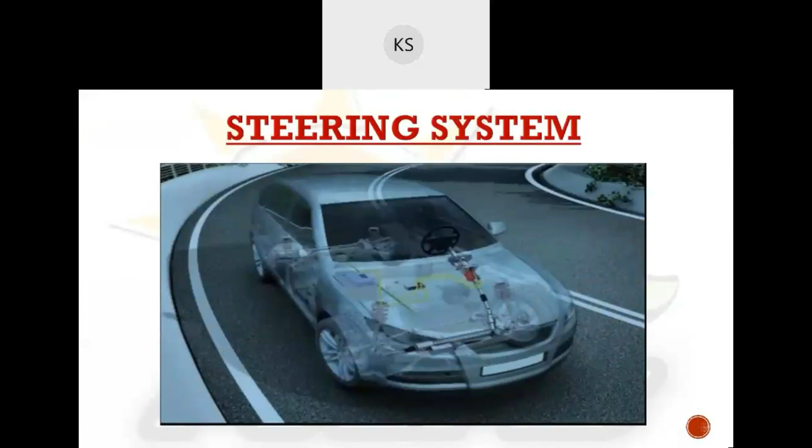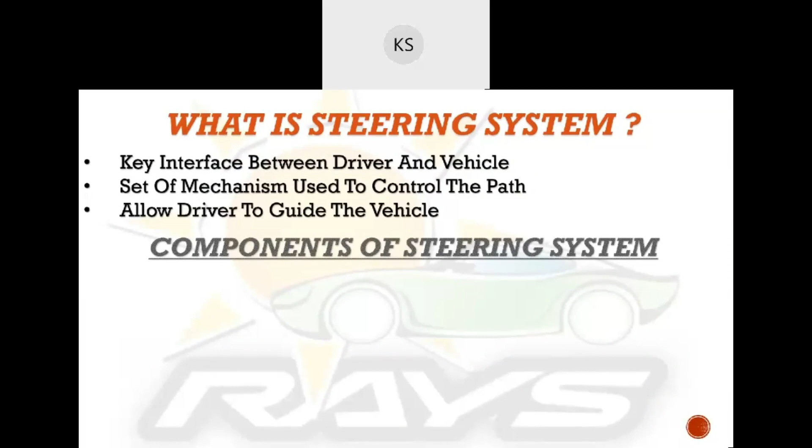So now we will see the steering system. So what is a steering system? Basically, it is a key interface between a driver and vehicle. It converts the rotation of the steering wheel into a swiveling movement of the road wheels in such a way that the steering wheel rim turns a long way to move the road wheels a short way, which allows the driver to guide the vehicle.

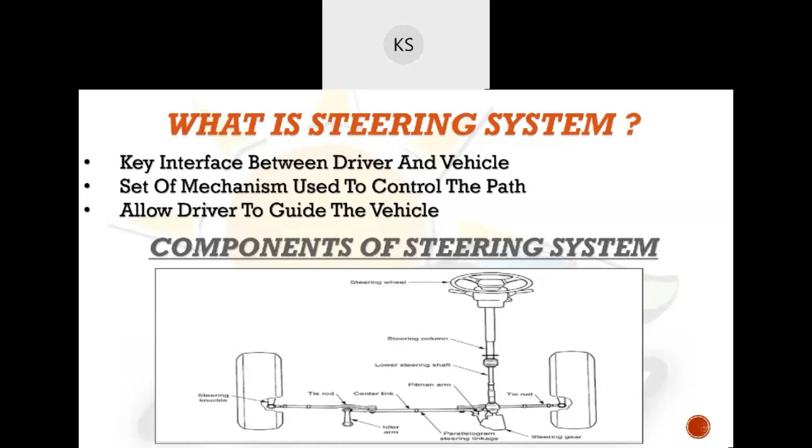So now we will see the various components of the steering system. It includes steering wheel, steering column, lower steering shaft, pitman arm, tie rod, steering gear, parallelogram steering linkage, center link, idler arm, tie rod, and steering knuckle.

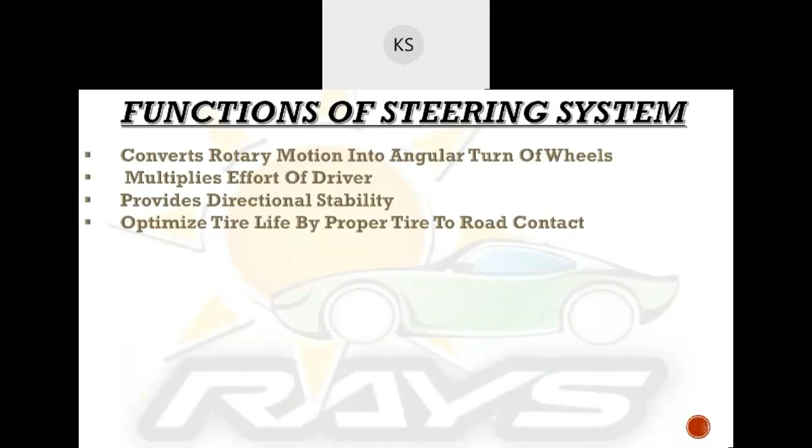Now let's have a look at the functions of a steering system. It converts rotary motion into angular turns of wheels. The system allows a driver to use only light forces to steer a heavy car, so it multiplies the efforts of the driver.

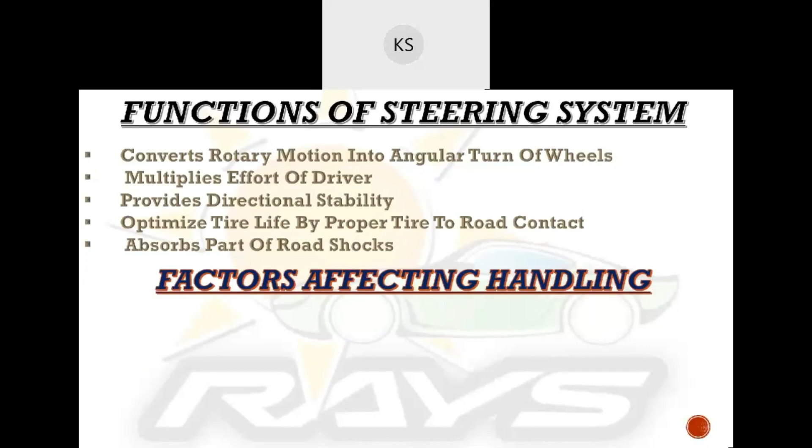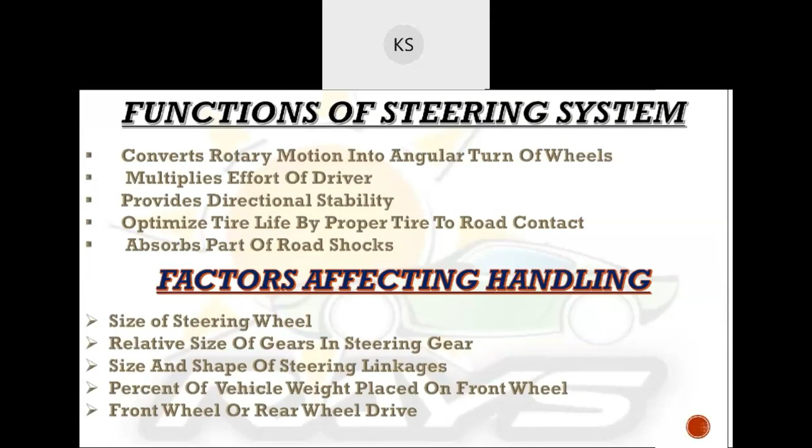It provides directional stability. It absorbs part of road shocks and optimizes the tire life by proper tire to road contact. So these were some of the functions of the steering system. Now the factors which will affect the handling are size of steering wheel, relative size of gears in steering gear, size and shape of steering linkages, percent of vehicle's weight placed on the front wheel, and the front wheel or rear wheel drive. So that was the brief introduction of a steering system.

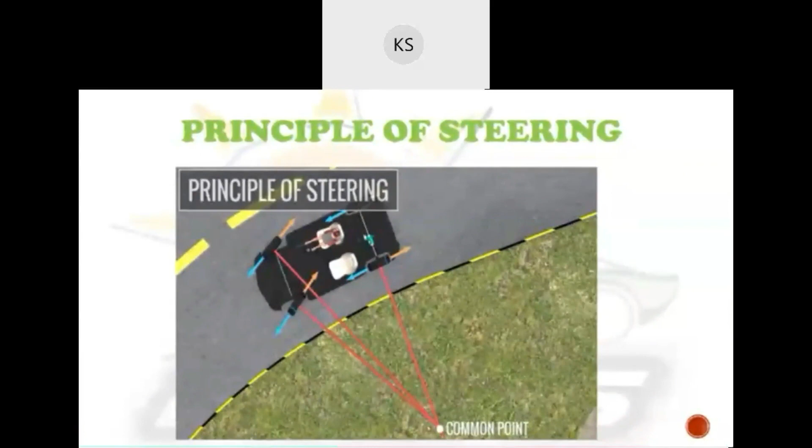Now, as Kusagra explained to you about the functions and factors of steering system, let us know about the working of steering systems and different types of steering systems. Before that, we have to understand the principle of steering system. While we take a turn, there are some amazing physics and mechanics beneath the steering wheel, which keeps the vehicle without any skidding of wheels. Now, let us consider a rolling wheel. The rolling wheel must have zero velocity at the contact of the road. This will make sure that there would be no chance of slippage.

Now, what about when the car takes a turn? When a wheel takes a turn, both will not get cancelled. In order to get cancelled, the vehicle should take a turn with respect to the center point or common point. Now, how do we get this common point? See, we draw a line from the back of the wheels, and two lines from the front wheels. As these three lines combine at a point, that point is called common point. With this common point, the whole vehicle takes a turn so that we can get zero velocity at the contact. So this is called principle of steering.

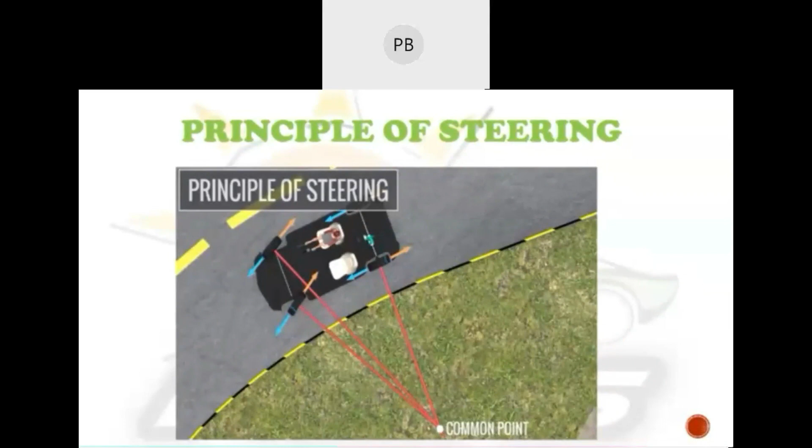Now let us see about manual steering. In the manual steering, the components are: the green color we call as rack, and upon the rack we have pinion, the blue color we have arms, and the white color we have tie rods. See here, the teeth present in the rack are used to make it move sideways. So the pinion makes this rack move sideways. The rack only moves sideways and the pinion helps it move sideways, so the wheel can take turns. Now there is a short video so you can understand easily.

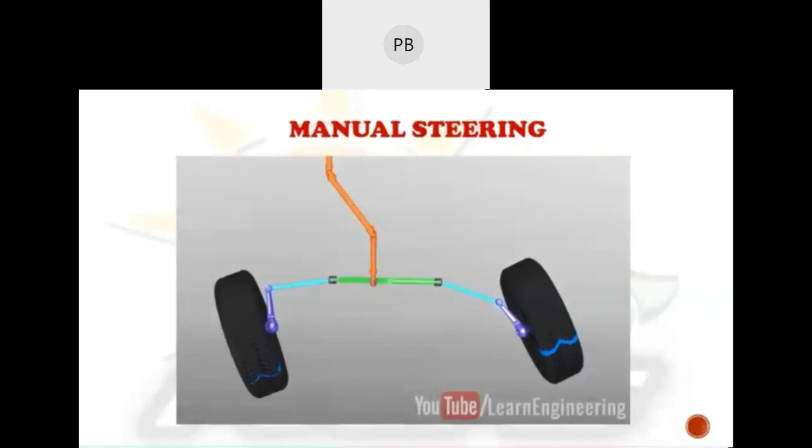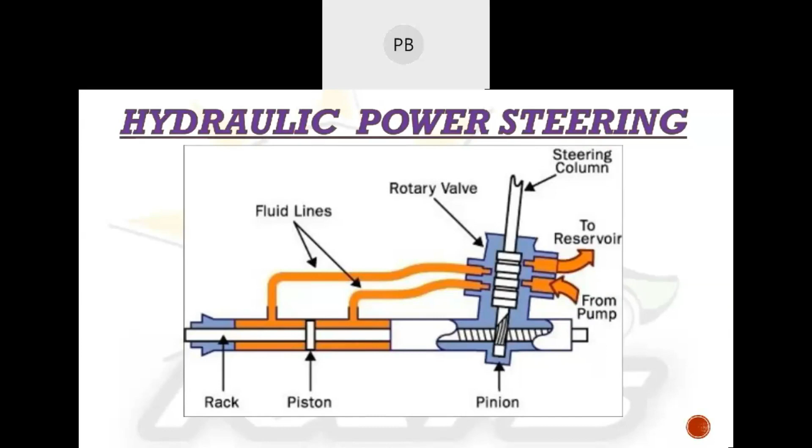Now hydraulic power steering. These are the components. We have steering column upwards. Before the steering column, we have rotary valve and the liquid, with the help of highly pressured liquid. Now let us see the working of the hydraulic power steering. Next slide. See here, you can easily observe. Here we have a reservoir in which the highly pressured oil is present. The liquid in the reservoir is sent to the oil pump and it goes through the directional control valve. As per the direction the driver wants, the liquid is then supplied to the piston. As the liquid is very highly pressured, the piston will get pushed.

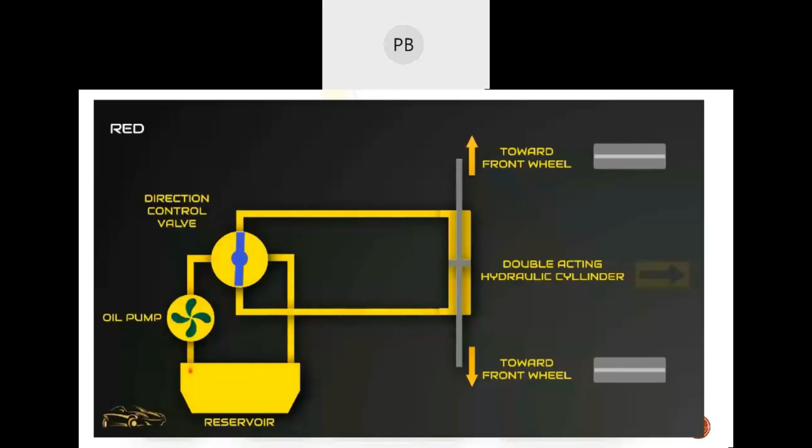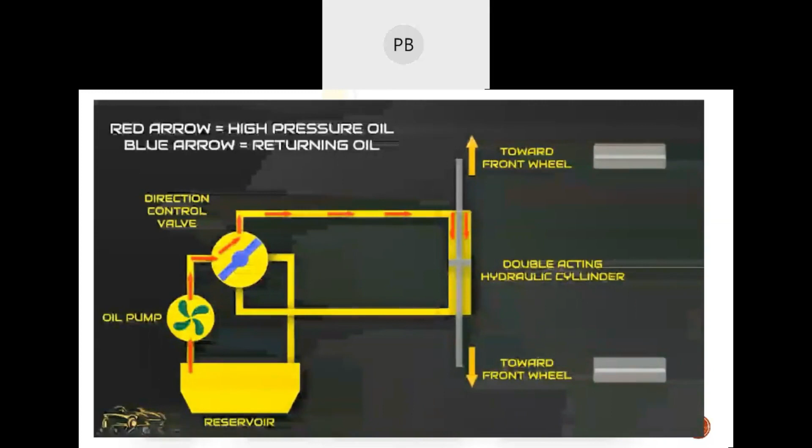So if the driver wants a right turn, then the piston will get pushed towards the left, so the driver can get the right turn. Here is a short video so you can easily observe. The liquid is passed through the oil pump and then the directional control valve, and the liquid passes near to the piston. As the liquid is very highly pressured, the piston gets pushed. As the piston gets pushed, automatically the rack gets pushed. As the rack gets pushed, the wheels take the turns, and some of the hydraulic fluid comes back to the reservoir.

And now electric power steering. Nowadays most cars are using power steering. The main reason to use power steering is it makes steering effortless and more accurate. Near the rack we have a cylindrical shape, in which we have a brushless DC motor. It is the main key to take the turn. This brushless DC motor rotates both in clockwise and anti-clockwise direction. When the driver wants a right turn, it takes the clockwise direction. When the driver wants a left turn, it takes the anti-clockwise direction.

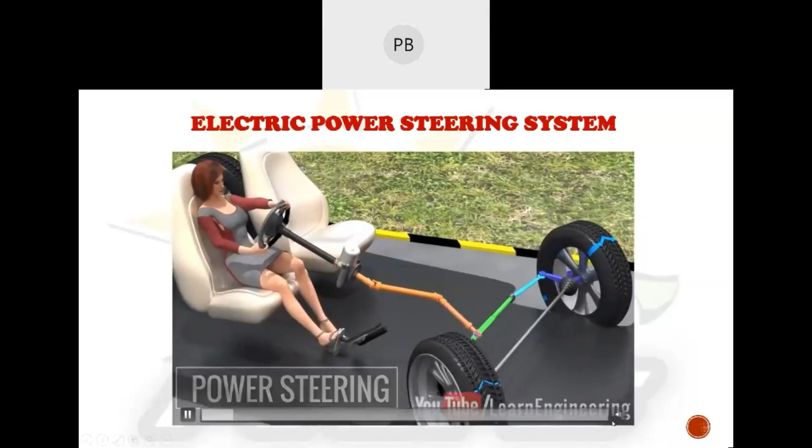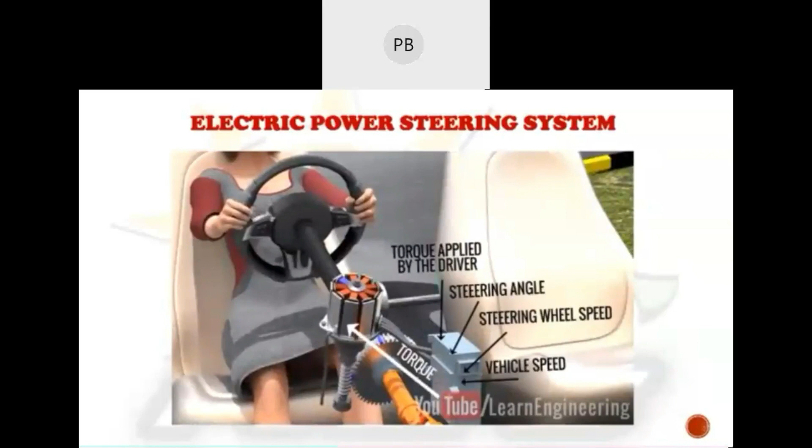Main part. So this ECU takes the torque from the driver as the input and then decides the amount of torque to be applied on the rack. So in this way, the wheels get the turns.

Next, we see the difference between the manual and power steering. So manual steering is we have only rack and pinion, so drivers should apply more torque. But in the case of power steering or hydraulic steering, there are some external forces by using oil or electric, so the driver can apply a small amount of force.

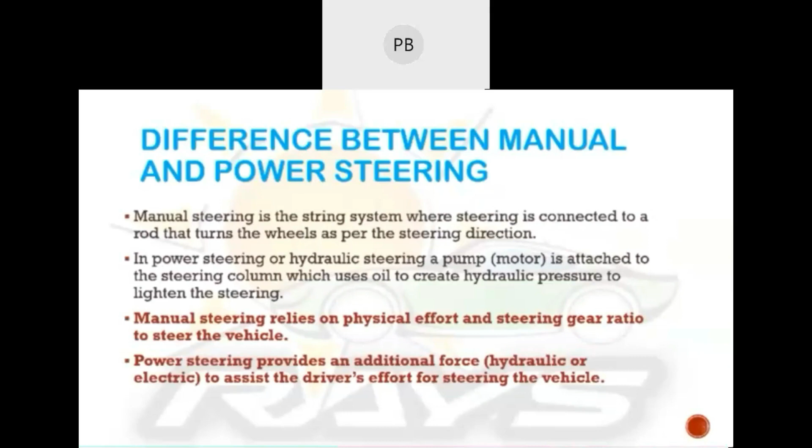Now, manual steering relies on physical effort and steering gear ratio to steer the vehicle. But in the case of power steering, it provides an additional force, whether it is from hydraulic or electric, to assist the driver effort for steering the vehicle. And now I introduce Komal Rani to explain you about the suspension system.

So now, starting with what is suspension system? It is a term given to the system of springs, shock absorbers, and linkages. It serves a dual purpose, like it contributes to the car's handling as well as braking. It protects the vehicle from any kind of wear and tear.

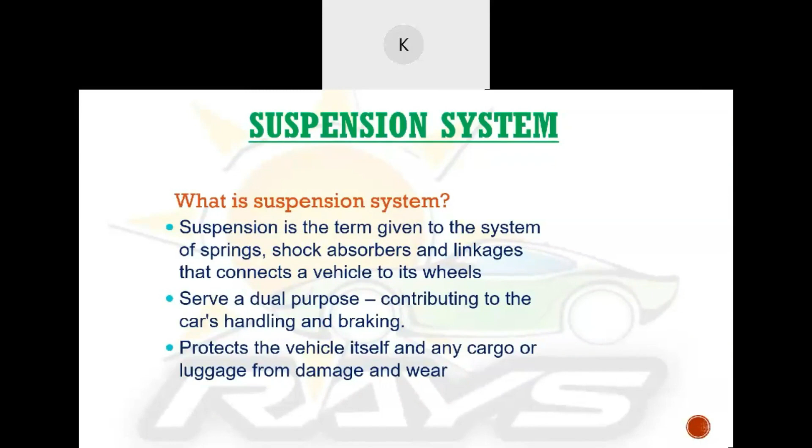Next slide. Now coming to what is the purpose of suspension system? Suspension system provides stability to the vehicle in dynamic conditions like high speed, sharp turns, and braking. It keeps tires in firm contact with the road. It works with the steering system to keep the wheel in correct alignment.

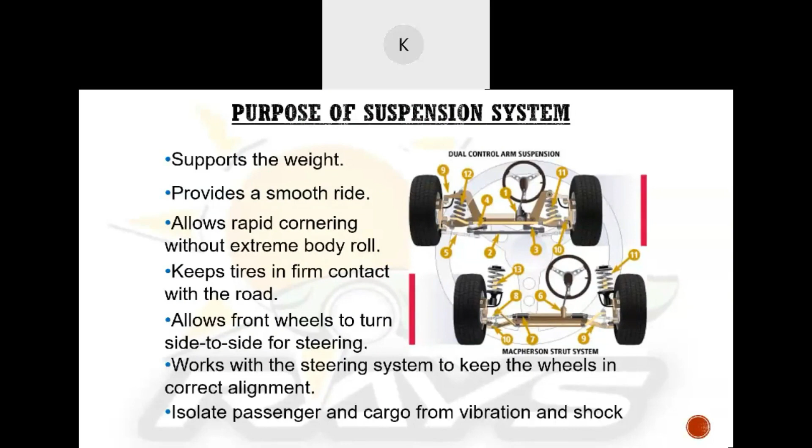Now coming to the types of suspension system. There are two types of suspension system. First one is non-independent suspension system. Before starting the types, you must be familiar with the fact that the front left and the right wheel are connected through the solid axle and the front wheel and the rear wheel are connected to the solid live axle.

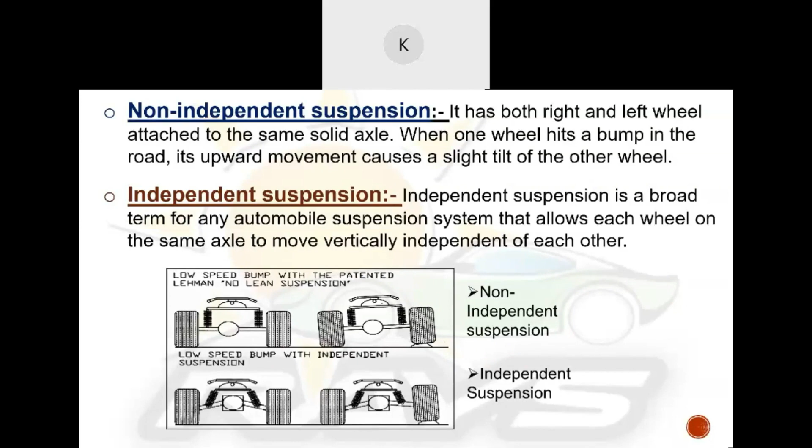When the front wheel comes across any bump, it leads to the upliftment of the opposite wheel connected to the solid axle or the rear wheel connected to the solid live axle, and it is used in case of trucks. The second one is independent suspension system. In this, each wheel on the same axle is allowed to move vertically independent of each other. Now, Mosam will continue further with the parts of suspension system.

Thank you, Komal. Now coming to the basic parts of the suspension system. So the very first part is spring. A spring provides support to the weight of the vehicle. It also permits the control arm and the wheel to move up and down. Now the next part of the suspension system is shock absorbers. These are also called dampeners, which keep the suspension from bouncing back after compression and extension of the spring.

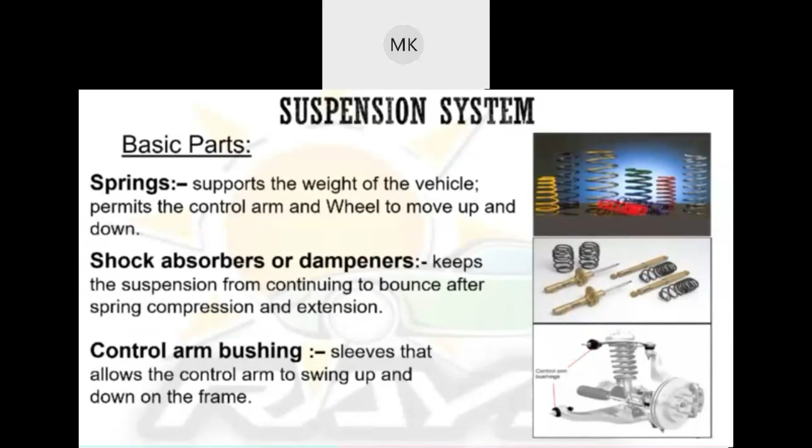The third part is control arm bushing. These are the metal sleeves that allow the control arm to swing up and down on the frame. A bushing is used to provide stability to the vehicle.

Now talking about the basic tire terminology, the very first term which we should know is camber angle. So what is camber angle? This is the angle which is subtended by the wheel plane with the vertical. There are two types of camber angle: positive camber angle and negative camber angle. A positive camber angle forms when the wheel tilts outwards from the vehicle, and the negative camber angle forms when the wheel tilts toward the inward side of the vehicle.

The next term is caster angle. It is the angle subtended by the steering axis with the true vertical. If the steering axis tilts to the rear side of the vehicle, then it is said positive caster angle. If the axis is straight, then it will be called zero caster angle. And if the axis tilts to the front side of the vehicle, then it is called negative caster angle. In general, positive caster angle is provided to most vehicles because it provides stability to the vehicle.

Now, what is toe in, toe out? If we look at the wheels from the upper side of the vehicle, we would observe that both of the wheels are not parallel. If the front of the wheels are going apart from the rear side of the wheel, then it is called toe out. And if the front of the wheels are going closer than the rear part of the wheel, then it will be called toe in. So that's all from me.

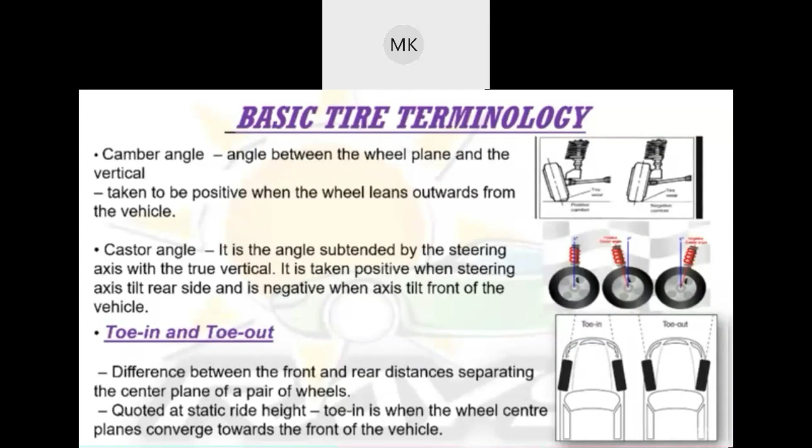Now I would like Sonu to come and continue the further part.

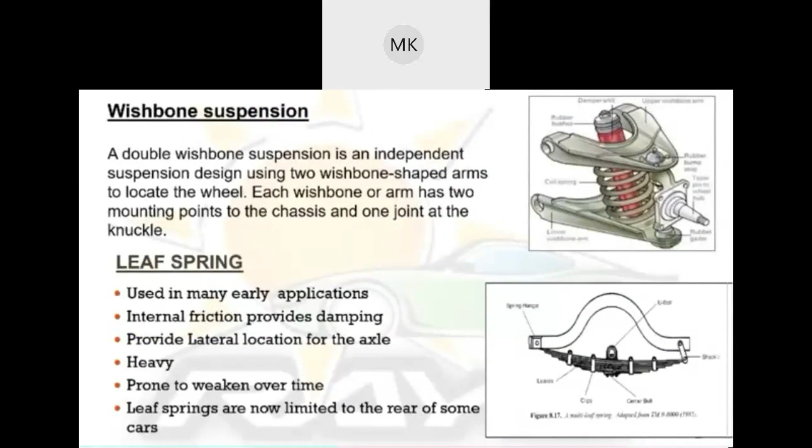As you have gone through what is suspension, its purpose, its basic parts, now you are going to see the types of suspension. There are various types of suspension, but we are interested in three of them. So first one is wishbone suspension. What is wishbone suspension? A double wishbone suspension is an independent suspension designed using two wishbone shaped arms to locate the wheel. Each wishbone or arm has two mounting points to the chassis and one joint at the knuckle.

Here, as you can observe in the figure at right side, there is a spring attached between two wishbones. This spring plays an important role in absorbing shock. Most importantly, in our solar car.

This type of suspension can be seen in large vehicles such as trucks. You can see on the right side in the figure, leaf spring is a set of blades, and in between blades, friction occurs, which provides damping. Also, it provides lateral location for the axle. It is heavier. With passage of time, due to internal friction, wear and tear of leaf spring happens, and it weakens them, and after some time, it breaks.

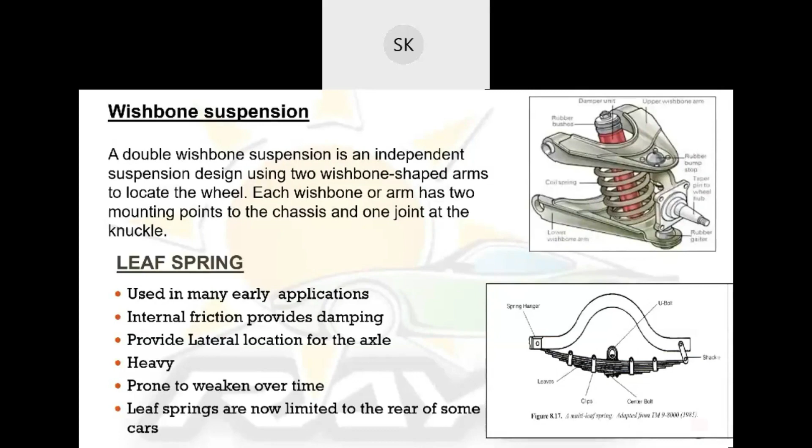Now, next one is coil spring. Slides. Change. In this, internal damping does not occur. Also, cost is low. Size is small, compact size, used in many suspension types. It is commonly used in modern vehicles.

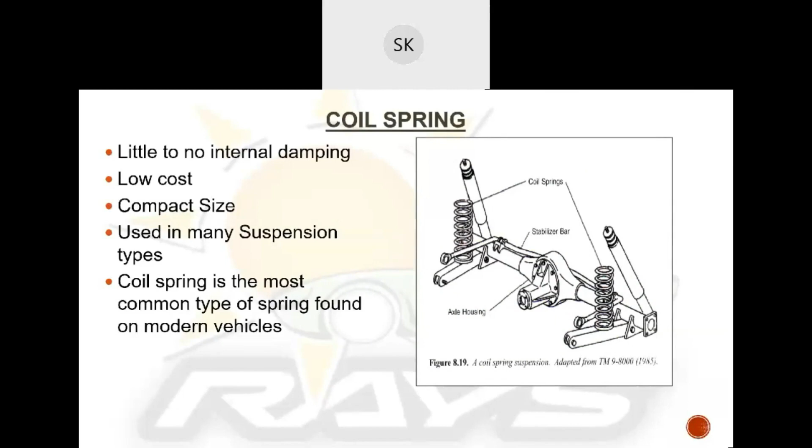Next. Now let's look at a new device, that is differential. Now, what is differential? The differential is a device that splits the engine torque two ways, allowing each output to spin at different speed. It means two wheels with common shaft can rotate with different angular speed. In the below picture, you can see there is an arrangement of gears in between shaft, and that is the main component of differential. It can be found in all modern cars and trucks.

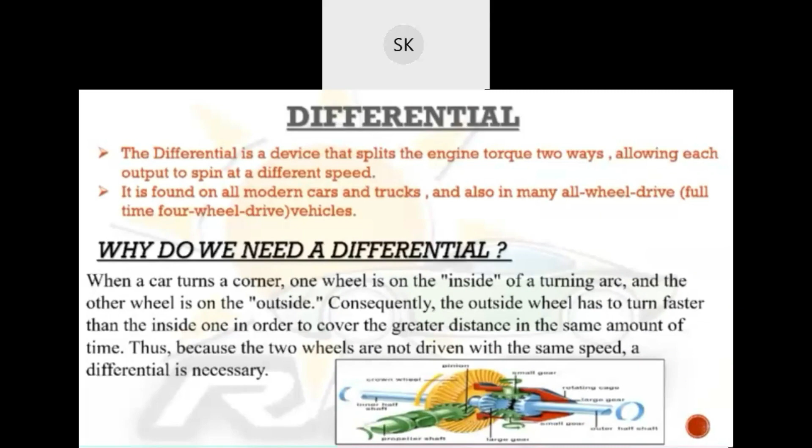Now let's understand why do we need a differential. When a car turns a corner, one wheel is on the inside of a turning arc and the other wheel is on the outside. Consequently, the outside wheel has to turn faster than the inside one in order to cover the greater distance in the same amount of time. Thus, because the two wheels are not driven with the same speed, a differential is necessary.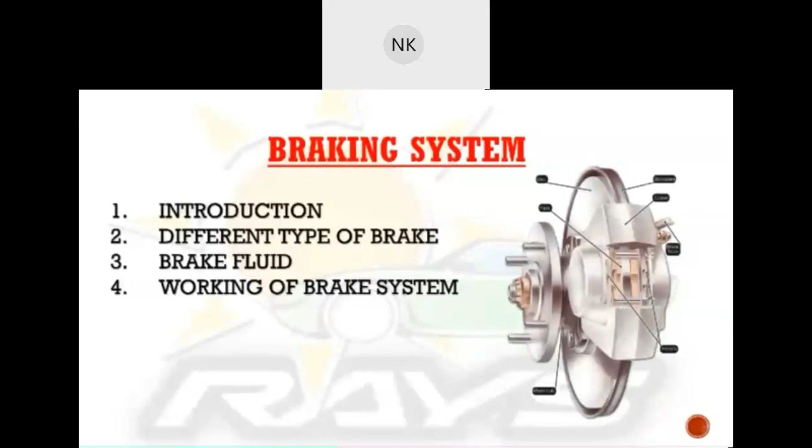Now, after seeing the suspension system and steering system, now I will be explaining braking system. So, when it's driving safety, nothing is more critical than your brakes. Purpose of brake in our vehicle is for either stopping the vehicle or reducing the speed. In this section of braking system, about the different types of brakes, braking fluid, because most used brakes are based on a hydraulic pressure system, and at last we will see about the working of braking system.

Now, starting from the introduction part, as I mentioned, braking is the mechanism used for slowing down and stopping the vehicle. And here we will also see how a small force on a brake pedal leads to stopping such a large vehicle. This we will see in the working of braking system. And moving on to main function of braking, it's to stop the vehicle safely in shortest possible distance in case of emergency, and to control the vehicle when it is descending along the hill, to keep the vehicle in the right position after braking, bringing it at rest.

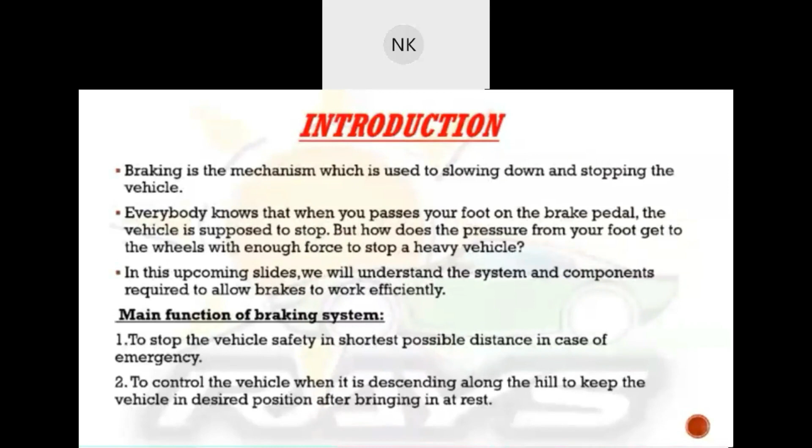Now we will see about different types of brakes. Mainly there are two types of brakes, disc and drum brakes. Disc brakes and drum brakes are both based on a hydraulic pressure system, and braking starts with a mechanical force, your foot pressing the brake pedal. Now starting with a disc brake. Disc brakes are found on most vehicles today. They are mounted on the front axle and often the rear as well.

Now a question might come in your mind, which brake is better? Although both brakes operate with same basic hydraulics, they perform differently. Disc brakes are more efficient and they are the most common types of brakes used nowadays, because they provide better stopping power. They dissipate the heat very easily, and they work better in wet conditions.

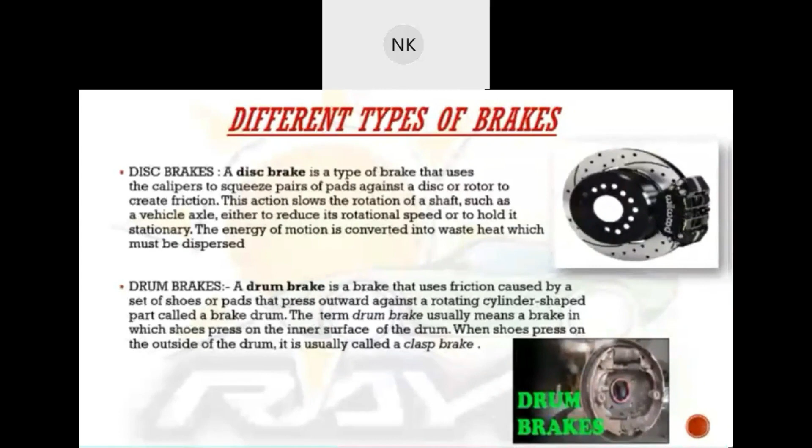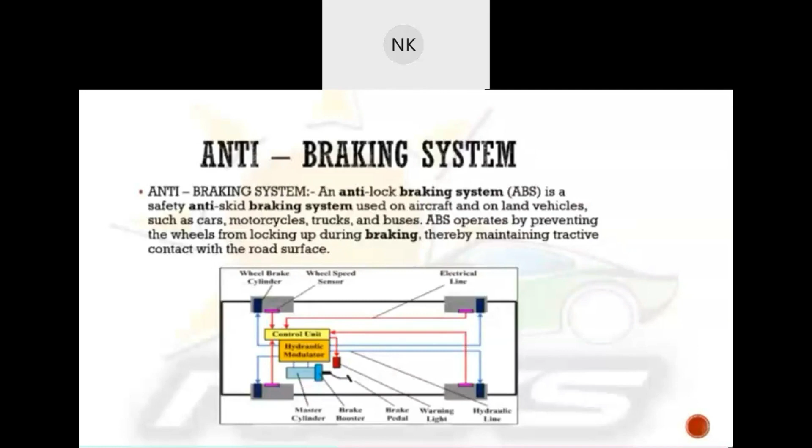You have learned from Nilay about what the braking system is, and its different types. Now let me tell you about the anti-braking system and why we use it in the vehicle. So even for an experienced driver, unexpected trouble can get in the way and he might suddenly hit the pedal, which can cause the wheels to get locked. This is when the anti-braking system comes in.

The anti-braking system is also called anti-lock braking system. This is an anti-skid braking system used in vehicles such as cars and trucks. This prevents the wheels from getting locked up when the brakes are applied. Hence, it prevents skidding of the wheels and it maintains the contact with the road.

So how does it work? Each wheel has a sensor attached to it and is monitored under heavy braking. If these sensors detect that the wheel is about to lock up and stop moving, the system will release the brake for a short moment.

This is continuously repeated and it applies optimum pressure to each wheel. It means the brake will be applied just enough to not lock the wheels and it prevents skidding. This is mainly used for the driver to remain in control of the vehicle. So guys, this was about the anti-braking system.

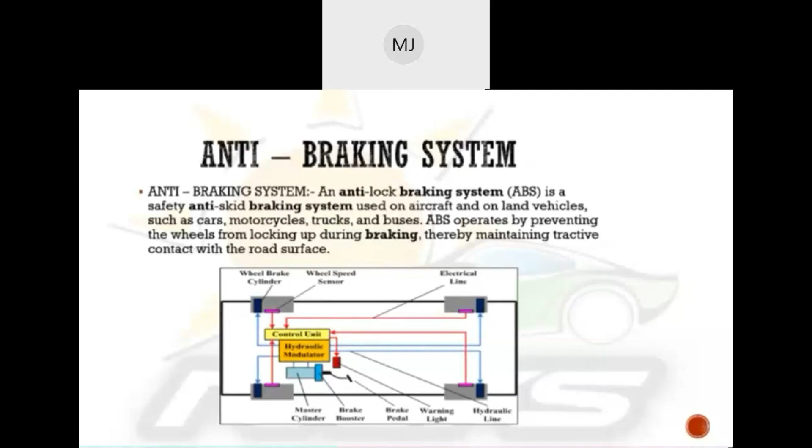So now let us know about what a brake fluid is and what it does in a braking system. So the brake fluid is an integral part of the braking system. It is a hydraulic fluid responsible to stop your vehicle when the brake is applied. Its principle is it transfers the pressure you apply through the pedal to all the wheels through a series of lines.

Now the brake fluid must meet certain requirements as defined by various standards for the brake system to work properly. When the brake fluid is subjected to very high temperature, especially when the brakes are applied, it must have a high boiling point for it to not get vaporized.

It creates a problem because the vapor created is highly compressible relative to the liquid and therefore it negates the hydraulic transfer of the brake force. So in turn, the brake becomes soft and therefore it will fail to stop the vehicle.

And again, brake fluids must not corrode the metals used in the components such as calipers and wheel cylinders. They must also protect against corrosion as moisture might enter the system. Based on how much moisture they absorb and how corrosive they are, brake fluids are categorized into three types as shown. They are castor oil based, glycol based, and silicone based.

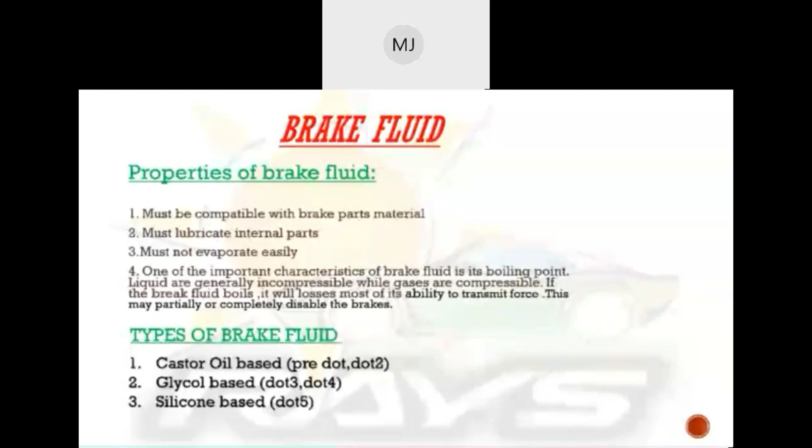A piston moves into the cylinder and it squeezes the hydraulic fluid out of the end, and hydraulic brake fluid is forced around the entire braking system within a network of brake lines, and pressure is transmitted equally to all four brakes through this brake fluid. The force creates friction between the brake pads and disc brakes in the wheel, which is what stops the vehicle.

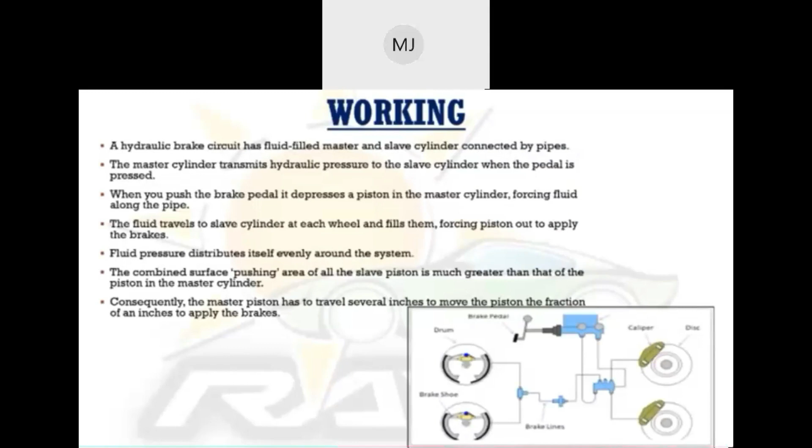Your first question is, as you have all gone through the braking section in our PPT, so can you answer which brake fluid our team uses? Option A is DOT 2, option B is DOT 4, option C is DOT 5. So Krishnam Kumar has commented first. So please unmute your mic and give us the answer.

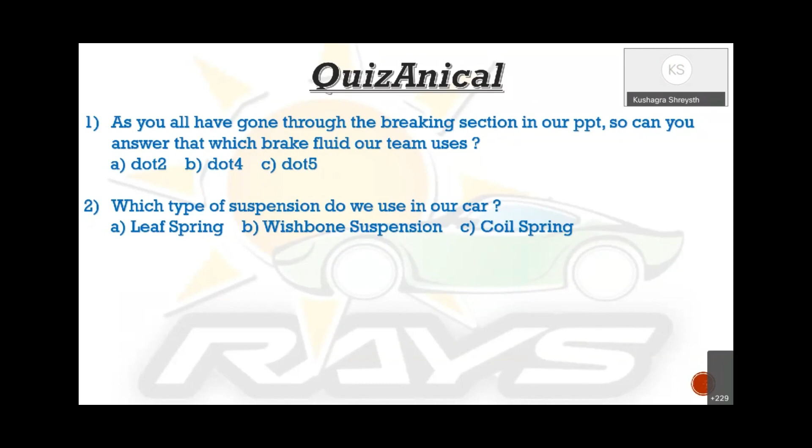It's caster. Yeah, so the answer is correct. The answer is caster. So this was all. Now moving to the electrical part, I would like to request Aman to begin.

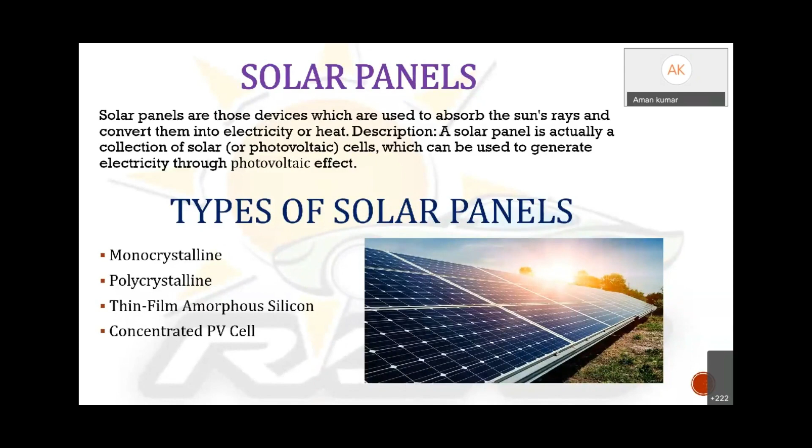So now in our car we use polycrystalline solar panels because it has the highest efficiency from these. So now let's discuss the details of the diagram of the solar panel. The solar panel consists of a frame and a glass which protects it from the dust and other outside particles, then encapsulant, then solar cells which generate electricity from the sun, then encapsulant, then backsheet, and then junction box from where the electricity is passed on.

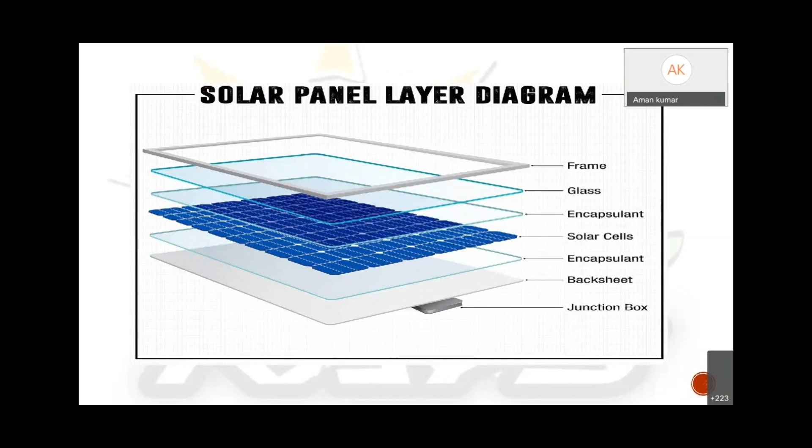So now we have all understood how the solar panels convert solar energy to electrical energy, but where to store and how to store? So your answer is MPPT. What is MPPT? MPPT stands for Maximum Power Point Tracking. Its core function is to make sure that the batteries are fully charged, then to control the power coming from the solar array so that the batteries are not overcharged and damaged. Most popular charge controllers are Outback's FM60, FM80, Xantrex XW60 MPPT.

So now let's discuss the working of MPPT. MPPT or maximum power point tracking can optimize the power going into our battery. Assume our battery is low at around 11.3 volts. MPPT can take that 17.6 volts at 7.39 amps and convert it so that the battery gets no longer 7.39 amps at 17.6 volts, but 10.16 amps at about 12.3 volts. Now we still had almost 130 watts, all going into our batteries.

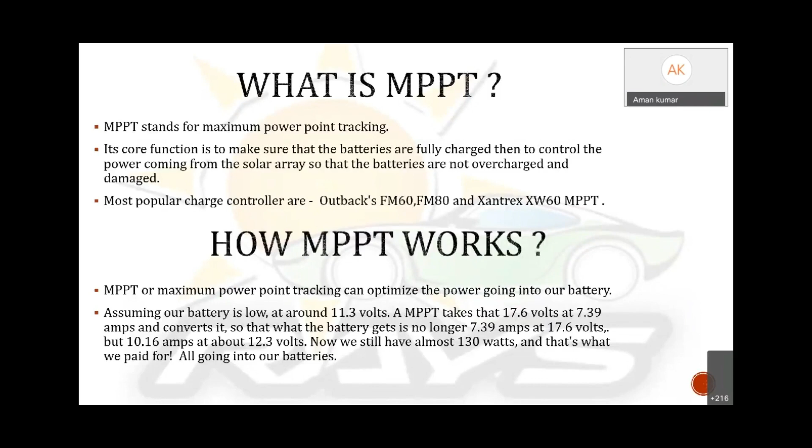Now I request Ashutosh Vimal to continue further on. Good afternoon, everyone. My name is Ashutosh Vimal. I am from electrical engineering. I'll be talking about the type of motors and battery we use in our vehicles.

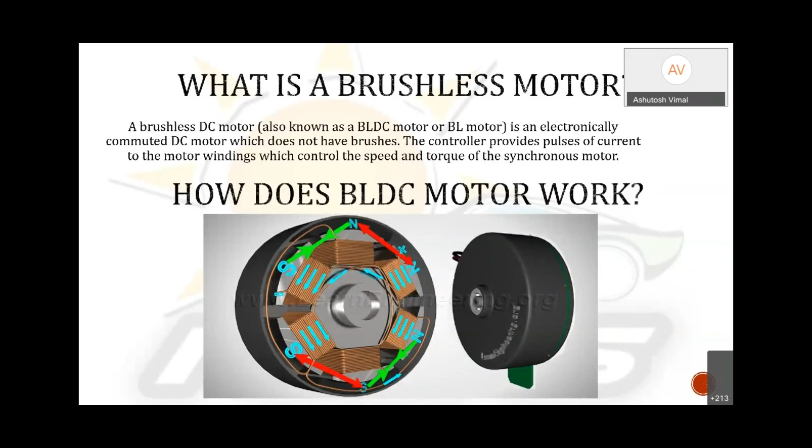Starting with motors, we use brushless motor. A brushless DC motor, also known as BLDC motor or BL motor, is an electronically commutated DC motor which does not have brushes. The controller provides pulses of current to the motor winding, which control the speed and torque of the synchronous motor. The figure describes how a BLDC motor works. Now coming to the next slide, the advantages of a brushless motor over brushed motor. One of the main advantages is high power to weight ratio. Second one is high speed. Third one is electronic control, and the fourth one is low maintenance.

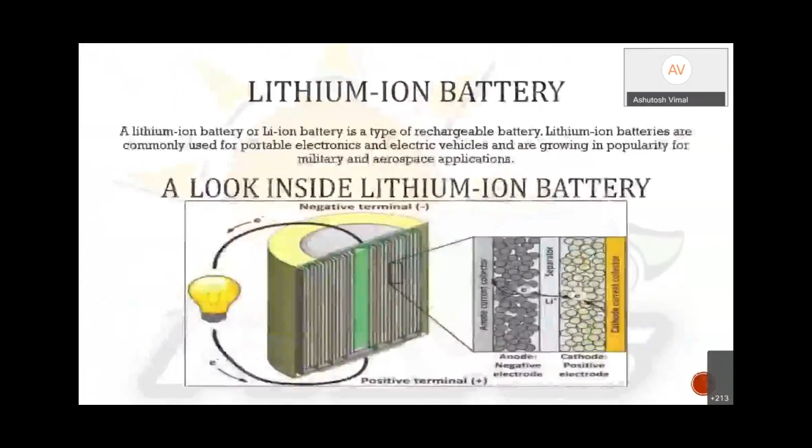A lithium ion battery, or just Li-ion battery, is a type of rechargeable battery. Lithium ion batteries are commonly used for portable electronics and electric vehicles and are growing in popularity for military and aerospace applications. Now let us look inside a lithium ion battery. A lithium ion battery is made up of a lot of small cells. The cells contain a cathode, an anode, and are separated by a separator. The most commercially popular anode is graphite, and cathodes are generally oxides of lithium. So that's all from my side. Thank you.

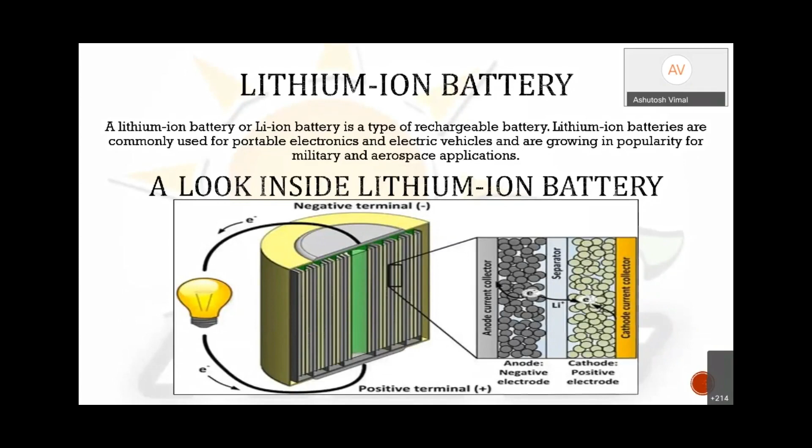Now I bring to you ElectroQuesters, a set of questions for you guys to test your understanding of the electrical domain. The rules remain the same. Whoever knows the answer to the first question is supposed to comment 1 in the chat box, and the fastest one will get a chance to unmute and answer. So the first question is, which type of solar panel do we use in our car?

Mopati, please unmute your mic and say the answer. Yes, Mopati. Please answer. Polycrystalline, sir. That's the correct answer. So the answer is polycrystalline. Good job. And Mopati, please comment your name, roll number, and branch in the chat box. Okay, ma'am.

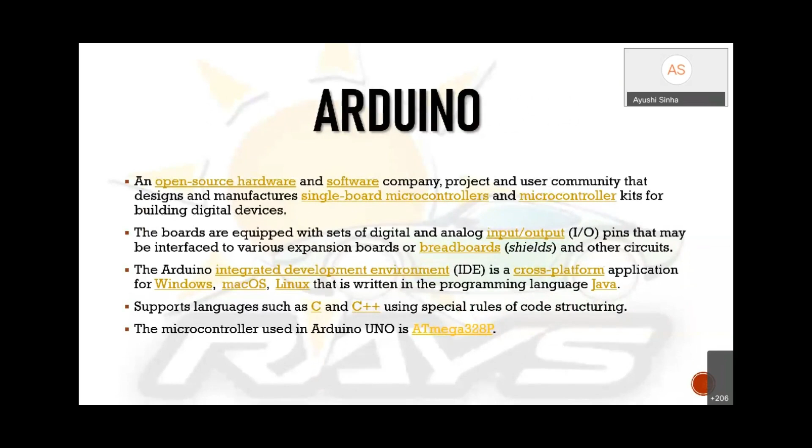Moving on, the Arduino integrated development environment is a cross-platform application for Windows, Mac OS, Linux that is written in the programming language Java. But it also supports languages such as C and C++, using special rules of code structuring.

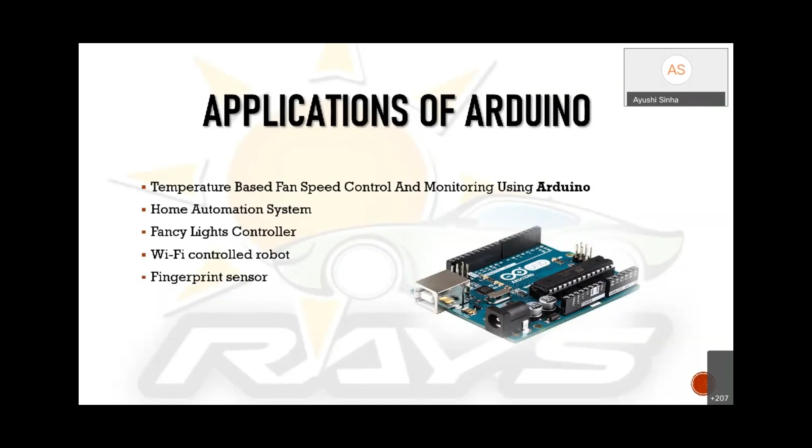Moving on to the applications of Arduino, Arduino finds its application in various technologies, be it home temperature based fan control and monitoring, or home automation system, or fancy lights controller, Wi-Fi controlled robot, or a fingerprint sensor, to name a few. This was all from my side about Arduino. Now Ria will continue with IR sensors.

Humans can't see infrared radiation as it is beyond the visible spectrum, but we have designed electronic detection devices to pick up these signals. An IR sensor is actually an electronic instrument that is used to sense certain characteristics of its surroundings by either emitting or detecting infrared radiation. Infrared sensors are also capable of measuring the heat being emitted by an object and detecting motion.

It actually has two parts, a light emitting diode, that is an LED, and a receiver. When an object comes close to the sensor, the infrared light from the LED reflects off of the object and is detected by the receiver. The physics behind infrared sensors is governed by the following three laws: the first one being Planck's radiation law, second Stefan-Boltzmann law, and the third one being Wien's displacement law.

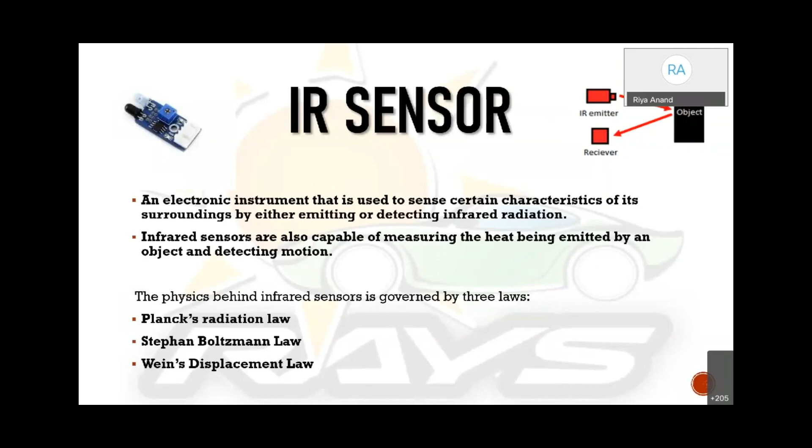Coming to PIR, that is passive infrared sensors. A passive infrared sensor is an electronic sensor that measures infrared light radiating from objects in its field of view. The term passive refers to the fact that PIR devices do not radiate energy for detection purposes. They work entirely by detecting infrared radiation emitted by or reflected from objects. It finds its uses in security alarms and automatic lighting applications.

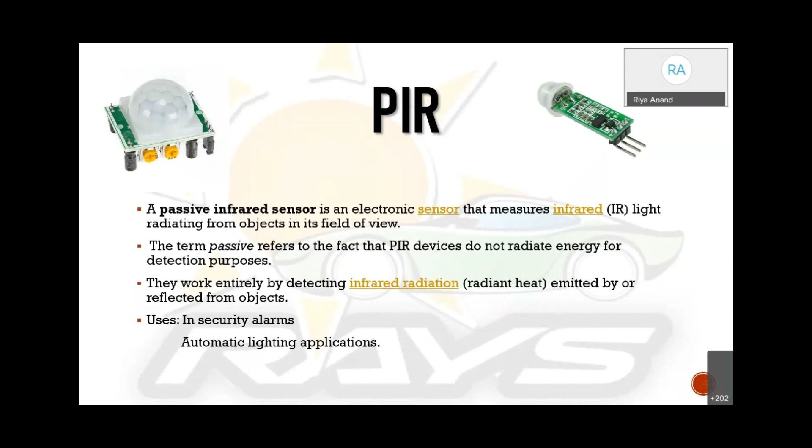The basic difference between IR and PIR sensors is that an IR sensor emits infrared light from the LED, whereas PIR sensors only detect infrared radiation and do not emit it from an LED. So that was all about IR and PIR sensors. From here, Nidhi will continue.

Hello everyone. After completion of IR and PIR sensors, here I am present to talk about LDR and fingerprint sensor. So starting with LDR. What is LDR? A light dependent resistor, or a photoresistor or photocell. It's a light controlled variable resistor. Here you can see a picture of LDR.

Now, how does it work? LDR works on the principle of photoconductivity. The resistance of a photoresistor decreases with increasing incident light intensity. Its resistance can vary from about 100 ohm in the sunlight to over 10 megaohm in absolute darkness. Now, coming to its uses. It is used in alarm clocks, street lights, photography exposure meters, light sensitive switches, etc. Now, moving forward to the next slide.

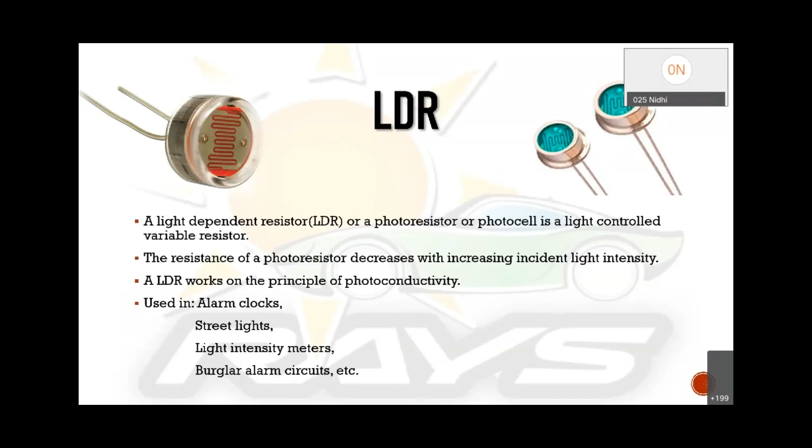So what are fingerprint scanners? Fingerprint scanners are a biometric security system. People have a pattern of ridges on their fingers. This fingerprint cannot be removed or changed. How does a fingerprint sensor work? The light sensitive microchip makes the digital image by looking at the ridges and valleys of the fingerprint, turning them into ones and zeros, and creates the user's own personal code.

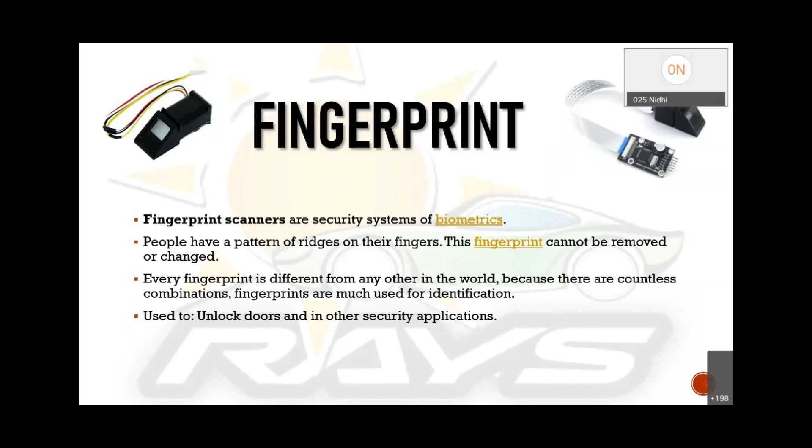Talking about its applications, in some doors, the Adafruit fingerprint scanner is used that can cater up to 160 fingerprints. The stored fingerprints are kept in the onboard flash memory. So that's all from my side. Now I would like to call upon Aditya to continue. Everyone, now we'll continue with the app development.

Aditya, I guess your voice is not clear.

Am I audible here? Now you are.

Now with the development section of our team. So we made an app for our team's car to perform some simple tasks. Now there are different IDEs for the development of an app, something like Android Studio, Flutter, or Visual Studio, etc. And the programming languages used for development of an app are Java, Kotlin, or C++. Okay, for the next slide.

Okay. So we use radio buttons or UI elements for integrating our car and our app. Simple radio buttons or something like that. Progress bar for our battery state. We also have smoke detector, alcohol detector, alert detector. The driver can use the alert detector in the car, and that will show that the driver has pushed the alert message. And we have also integrated different sensors with our car. The values taken by the sensors can also be seen with the help of our app.

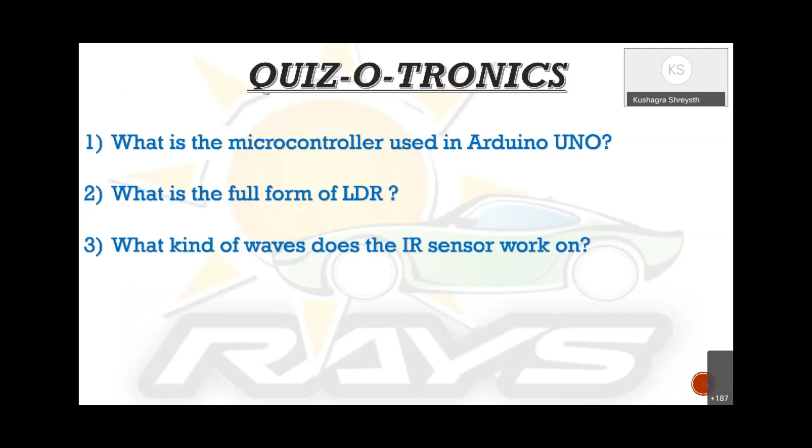The strength of the team is each individual member. The strength of each member is the team. So now I would like to introduce our team panel. Let us begin with our management team, led by our captain Manish Ras sir, followed by our vice captain Om Misra sir, and Shivam sir and Meenal ma'am as team manager.

Now our innovation team, headed by Ashutosh sir, Purushottam sir as app developer, Shivam sir, Shubham sir, and Aarti ma'am as team members. Now our electrical team includes Aditya sir as solar panel R&D head, Ram sir as GLVS head, Deepak sir as GLVS co-head, Vishal sir as electrical tractive head, and Pritam sir as electrical tractive co-head. Now sponsorship team, headed by Aarti ma'am, and Neeraj sir, Harsh sir, and Samiksha ma'am as team members.

Now we have design and manufacturing team with Subham Karmali sir as technical head, Siddharth Batwal sir as braking head, Vardhan Verapola sir as powertrain head, Rohit sir as powertrain co-head, Manish sir as design head, Narendra sir and Divakar sir as design co-heads, Neil Kamal sir as suspension head, Rishikesh Rudra sir as suspension co-head, Suvam Prakash sir as fabrication head, Viswajit sir as fabrication co-head, Sasank sir as steering head.

We also have Shivam Chandra sir as creative head, Minal ma'am as PR head, Suvam Karmali sir as creative co-head, Aarti ma'am as social handler.